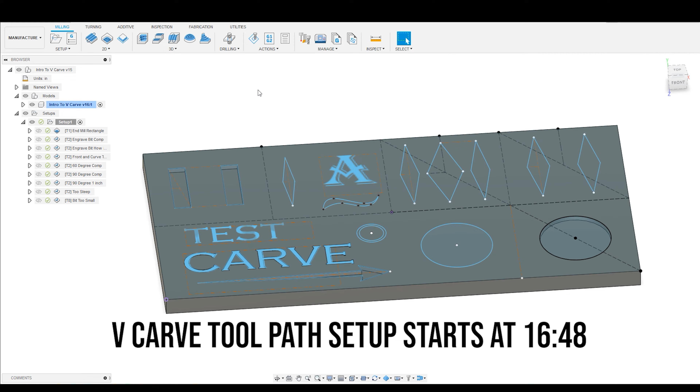All right, so let's start at the very beginning because I have heard that that is a very good place to start. And the first question is, what is a V-carve? A V-carve, as the name suggests, is carving into a material with a V-shaped bit like you see here. The next question is, why? Well, a V-shaped bit allows you to create, in your carve, sharp interior corners compared to what a round milling bit will create. So let me show you that with a quick example.

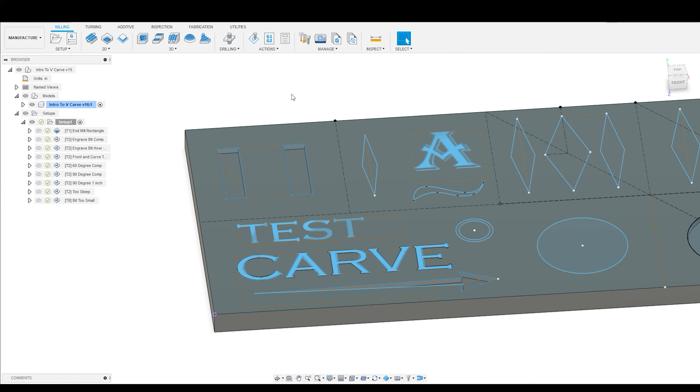Right here, I have two rectangular pockets. And in the first pocket, I've actually already set up a couple of toolpaths. And I've set this first toolpath up with a 1/4 inch end milling bit. Okay, so it's a 1/4 inch. And as you can see a little bit here, but I'm going to go ahead and simulate it to make it a little bit easier to see.

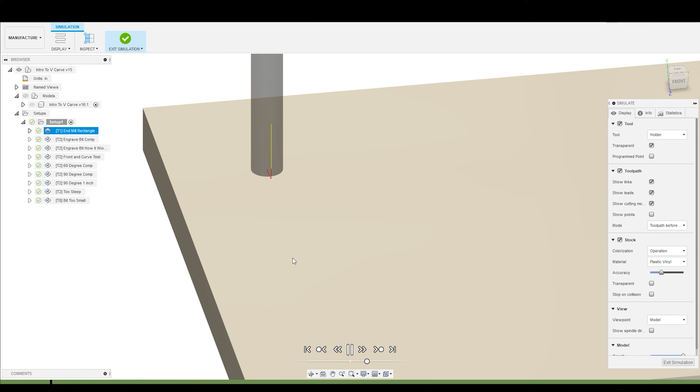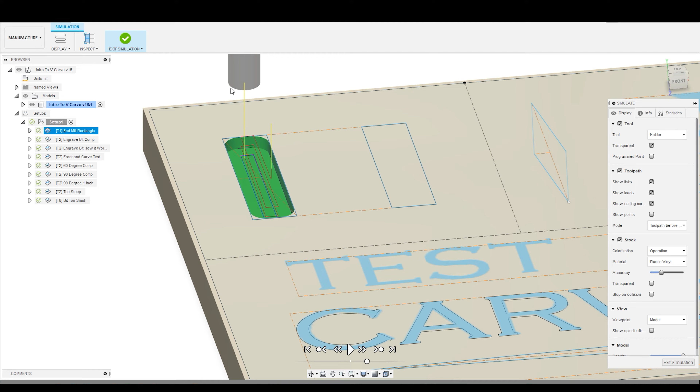As you can see, when I carve with a round end mill bit, the sharpest corner that I can create is the radius of the bit itself. In this case, it would be 1/8 of an inch. So even though I've got these sharp corners in the designed pocket, the tightest radius I can get is this 1/8 of an inch here.

By contrast, rather than using a round end mill, if I was to use a V-shaped engraving bit, as we see in example number 2, and now I'm going to simulate that, I am able to vary the depth of the cut, thereby allowing me to create the sharp corners that I had originally designed in. The next question is, how does V-carving work?

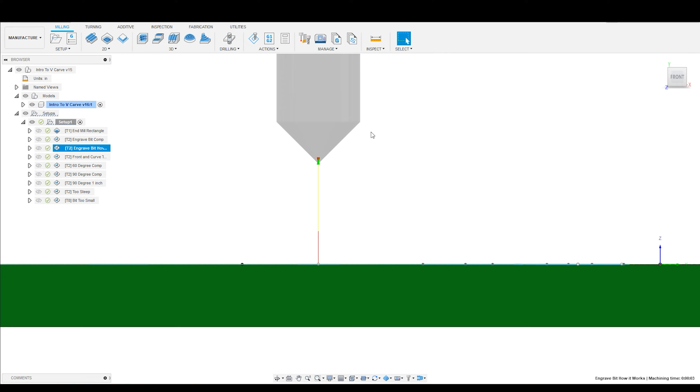Well, in order to illustrate V-carving, I'm going to pull up example number 3. So, V-carving, because I'm using a V-shaped bit, you can imagine this as my cutting surface. Starts off very, very narrow, and the width of the bit increases as you go up the sides of the shaft, or the cutting face.

So, if I go ahead and create this as a simple toolpath, what you'll see here is when I simulate this, the width of the cut here, as you can see, starts off very narrow and then it widens out. The width of the cut is determined by the depth of the bit. All right, so let's see that really quick.

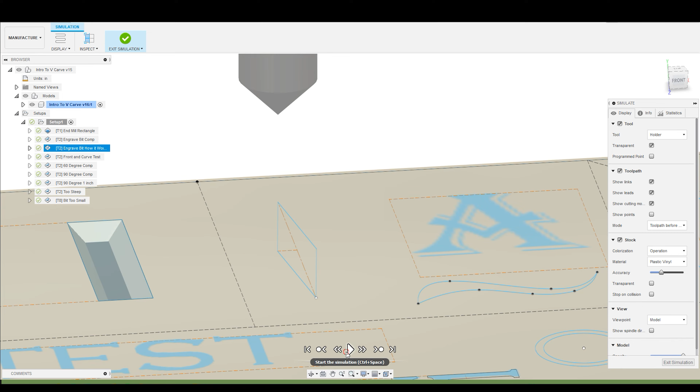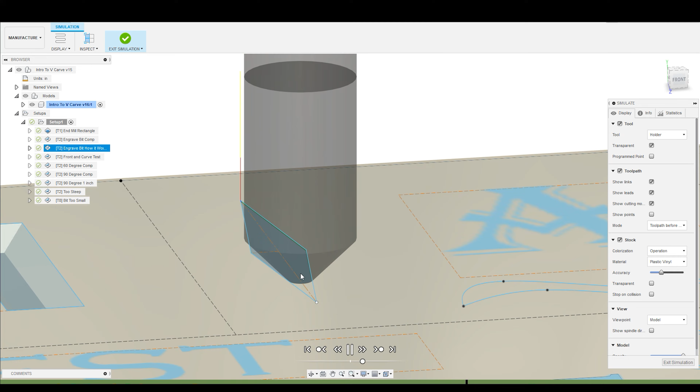As you can see here in this example, the bit, I'm going to change the angle a little bit and I'm going to slow it down. The bit is going to go deeper as it goes across the cut, thereby increasing the cutting width. And then as it starts to go back up, it will decrease the cutting width.

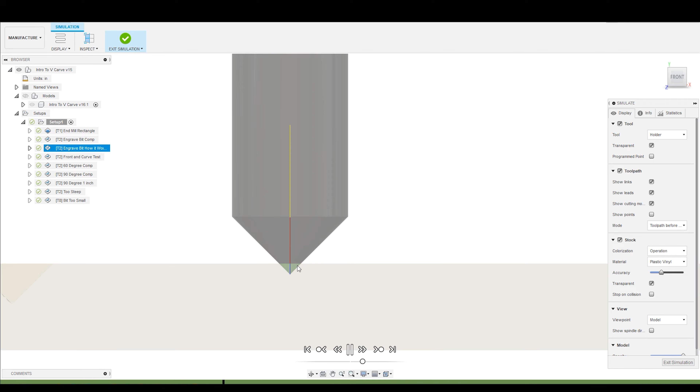I'm going to show you that one more time in the front view, and I'm going to turn transparency on. So let's look at that again. As the bit comes down, it's going to start off with essentially a 0 cutting diameter. And as it enters the material, the cut is going to get thicker as the bit goes deeper and narrower as the bit goes back up.

So in essence, it is the movement along the vertical axis, in this case the Z-axis, that allows me to change the width of the cut.

For this reason, V-carving is often referred to as 2.5D carving, because while the design that you are carving is essentially two-dimensional, a two-dimensional sketch sitting on a three-dimensional workpiece, because the bit is moving up and down and the depth changes are creating some geometry changes, it's essentially 2.5D carving.

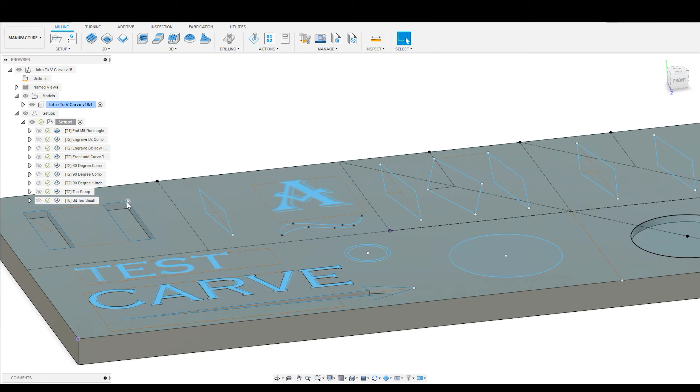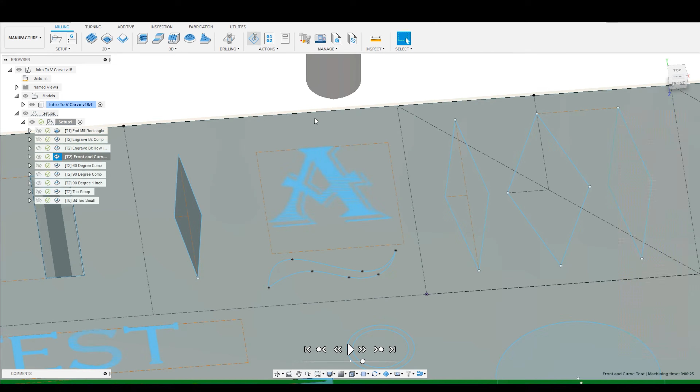Now, beyond just cutting sharp interior corners for things like squares and rectangles and diamonds, V-carving is also very useful when carving things like text and organic curvature. So for example, with the text, you can see, I'm going to start the simulation. With a simple V-bit, there's a lot going on here, right? There's a lot of very, very small, tight radiuses. There's a lot of detail.

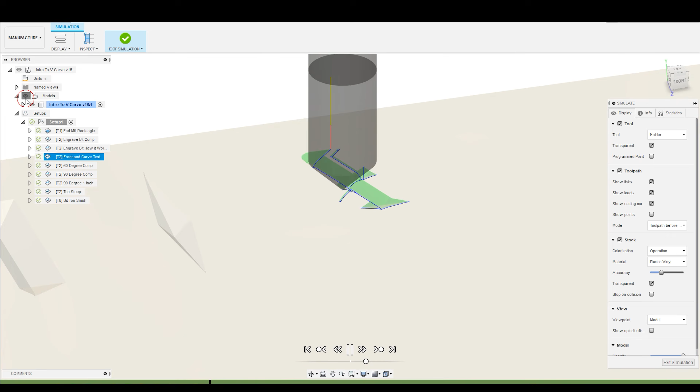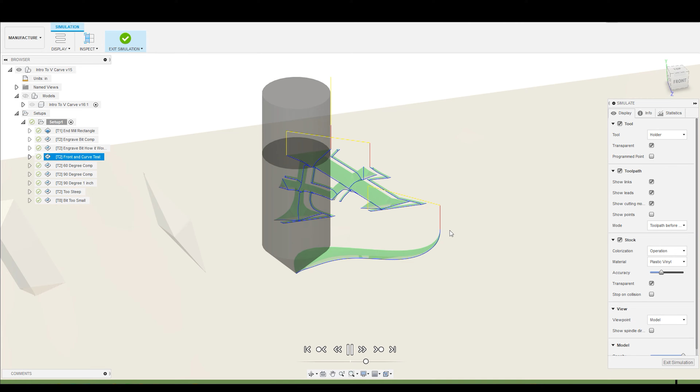And because this bit is able to move up and down in the workpiece, I'm going to turn the model off so you can see it. Because the bit is moving up and down in the workpiece following the form of that letter, I'm able to create some very intricate letter shapes, and beyond that, also some really interesting organic geometry in the face of my workpiece. So typically when you're going to be carving text or small details or illustrations or graphics, you are going to be using V-carving to do that.

The next thing that I want to talk to you about is what type of V-bit to select. There are two primary things that you're going to consider when selecting your bit. The first is the bit angle, and the second is the bit's maximum cutting diameter. So let's illustrate these two properties with some examples here. Let's first talk about the bit angle. So in the first rectangle here, I'm going to use the 60-degree bit, the sharper angle of the two.

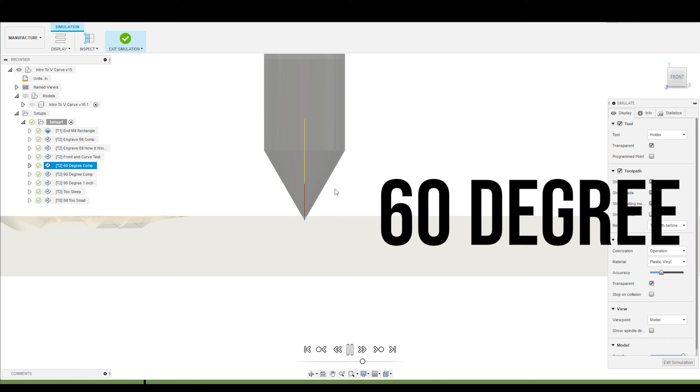All right, and I'm going to go ahead and simulate this cut. And as you can see, I'm able to do a successful cut into this workpiece. Let's look at that again from the front view. And as you can see, this bit has to go pretty deep to achieve the cutting width necessary to create this shape. Now, let's contrast that with our next bit, which is also a half-inch cutting diameter, but instead of a 60-degree angle, the second bit has a 90-degree angle.

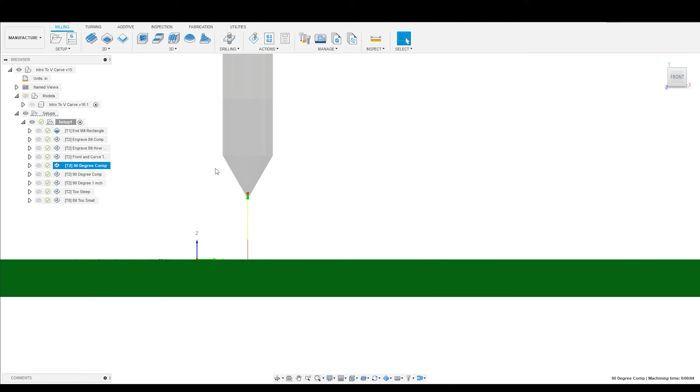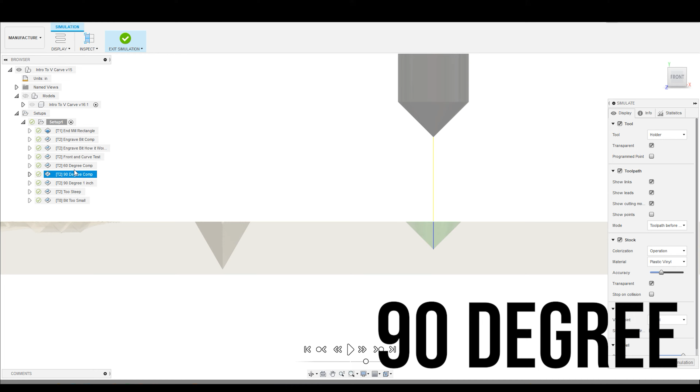So let's look at these at the front view very quickly just so you can kind of see the comparison. So here's our 60-degree bit. It's a very sharp angle versus our 90-degree bit, which is much flatter. All right, same rectangle, and let's create this same cut again. So as you can see, able to cut the shape pretty well, but by contrast, the depth required to create this cut is much shallower than the depth required for the 60-degree bit because it achieves this same cutting width at a much shorter depth in the Z direction.

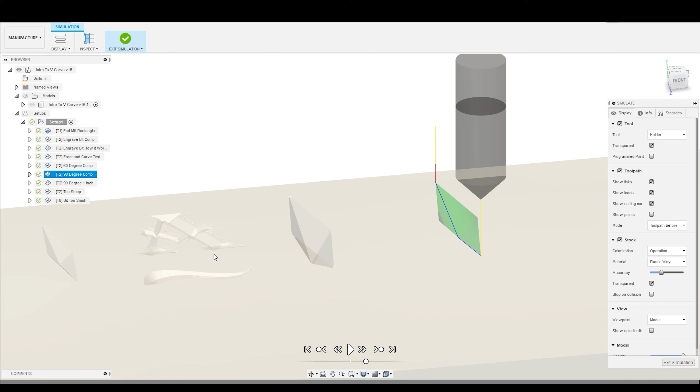So there's advantages to both. In some cases, especially when you're going to have a lot of very tight, fine detail, it often is nice to use a sharper bit angle because you can get a deeper cut. You're going to get more contrast. You're going to get more shadows off the side walls of your cut. But if you have a thinner workpiece, you're going to want to go with a wider or more open angle because it's going to allow you to achieve a greater cutting width at a shallower cutting depth.

The next thing that you're going to want to consider when selecting your V-bit is the maximum cutting width, or the maximum cutting diameter. So in this case, both the 60-degree bit and the 90-degree bit that I'm showing you have a maximum cutting width of ½ inch. Now let's look at this third diamond example. This diamond has a width of about 0.65 inches. Don't remember exactly where I set it, but it's essentially 0.65. Which means that neither of these bits is going to be able to cut this rectangle.

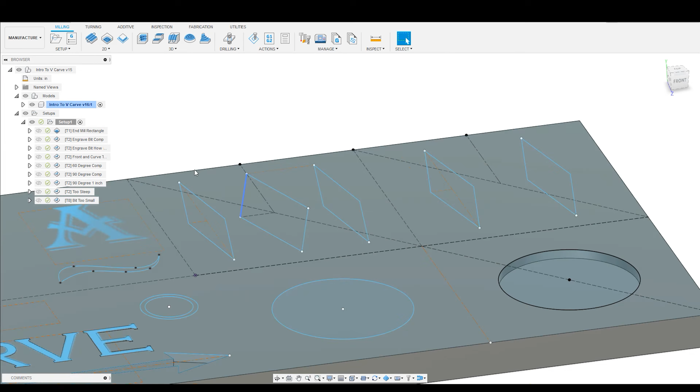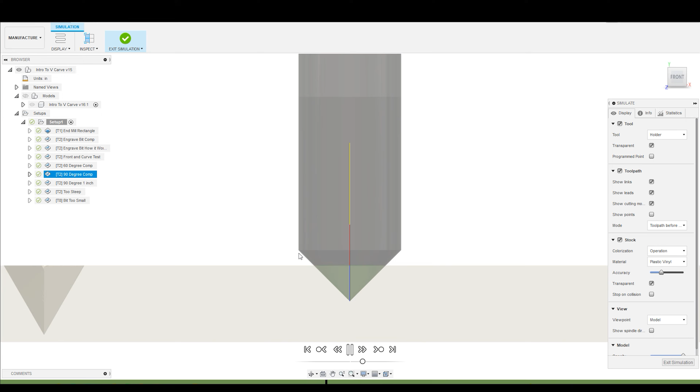Let's go back to that 90-degree bit one more time. And I want to show you where we are. So when I drill this bit down, this is getting very close to the maximum cutting width that I can achieve. So ½ inch here to here. As you can see, I'm going pretty deep, and I've only got maybe 0.1 or so inches left. So I don't have very much cutting face left in order to go deeper and thereby go wider in my cutting width.

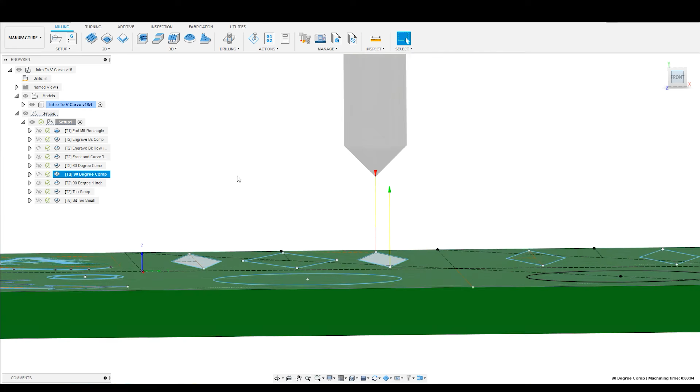So in order to achieve a greater cutting width, I'm going to use a 90-degree bit with a maximum 1-inch cutting diameter, which is going to look more like this. So going back, this is a ½ inch bit, and then this is a 1-inch bit. Same cutting angle, but a much wider maximum cutting width. So let's go ahead and run this simulation. As you can see, this bit is going to come down, and it's got a much wider cutting face in order to achieve that wider width.

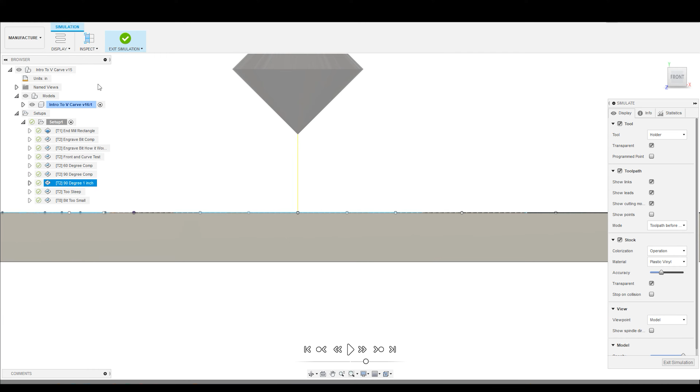Now let's look at the same simulation again from the front view so we can see the comparison. As you can see, same cutting angle as my 90-degree bit, but because I've got this much larger maximum cutting width, I'm able to cut a wider triangle or a wider shape using this bit.

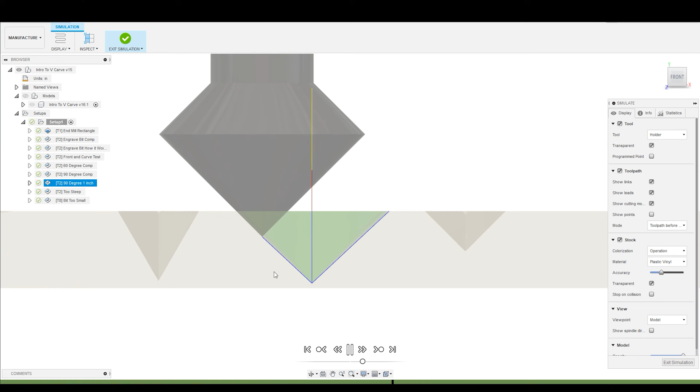So to recap, there's two primary factors that you're going to want to consider when selecting your V-bit. First is the cutting angle, how steep are the sides of your bit, and second is the maximum cutting width of your bit. A wider bit is going to allow you to create a wider cut.

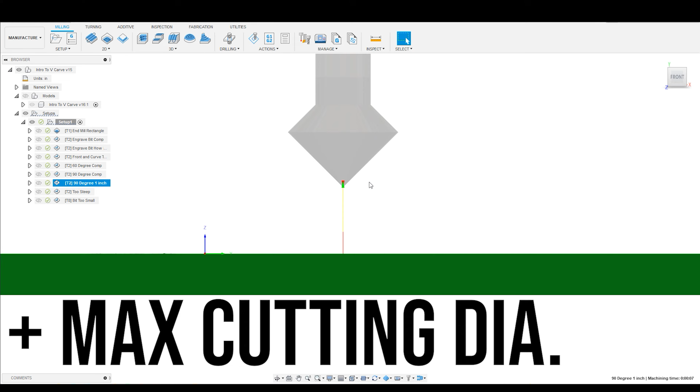So now that we've got that understanding, there are a few other things that you need to consider when selecting your V-bit for your V Carve. And I think based off of this example here, and you can see how deep we're getting into the workpiece, you can start to see what I'm talking about. Now, I'm going to show you what happens when we cut this diamond shape with my 60-degree bit.

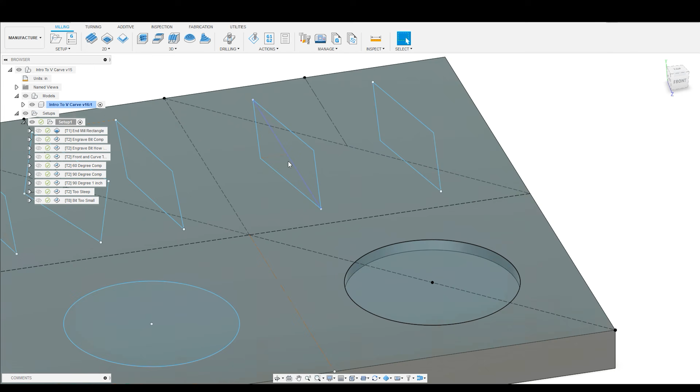All right, so I've got this set up with my 60-degree cutting bit. And it's a slightly wider diamond shape than in the last example. I'm going to run this simulation. Let's turn the model off so we can see the full simulation. Bit is going to come down, start cutting into the workpiece, and we're starting to see the problem here. Can you see it? There's a little hole right here at the bottom.

Let's look at that again from the front face. Run this simulation, bit is going to come down, and as we're starting to get a little bit wider in our shape, right there, our bit has punched through the bottom of our workpiece.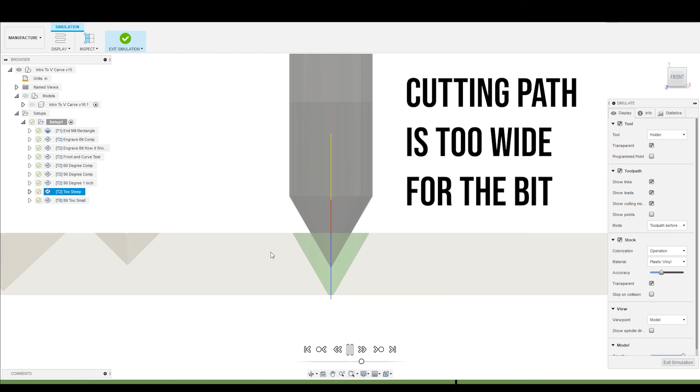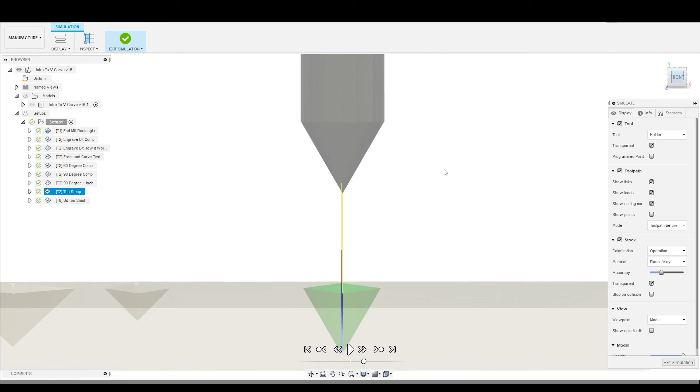Now, Fusion 360, like any software program, is only going to be as smart as you are. It's going to run the toolpaths that you set. So you have to be very careful that the maximum width of your cut does not exceed what your bit is capable of. Because if you are going to go into this situation, not only are you going to end up with a hole in your workpiece, you also are going to run the risk of damaging your spoil board.

You have the potential of breaking your bit if it hits something hard inside of your spoil board. So a lot can go wrong if you don't check your simulations and check your toolpaths to make sure that your bit can handle it.

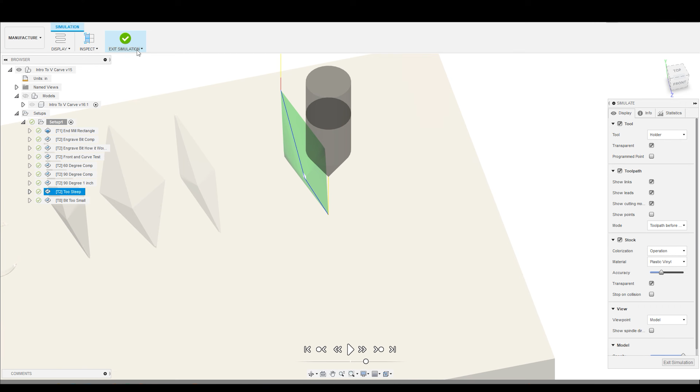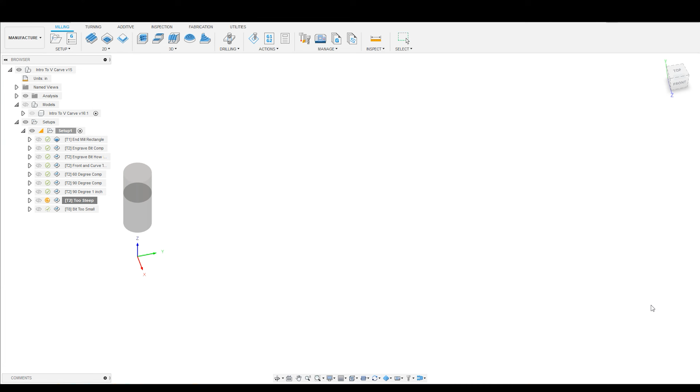Now, this particular issue can be solved pretty easily by going into the toolpath, going to edit, and rather than selecting my 60-degree bit, I'm going to go here and select my 90-degree bit. I'll select that bit and hit OK. Let's run this simulation again, and instead of going with the 60-degree bit, we now have our 90-degree bit. So running the same simulation. Seems to be cutting well.

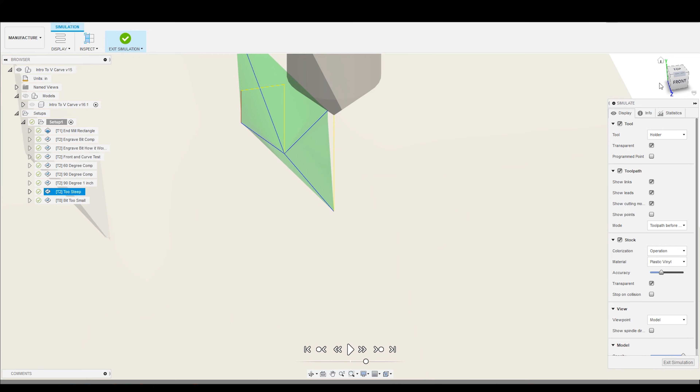And once that completes, we are going to check it. Looks pretty good. And let's go to the front view with the transparency turned on. Check it one more time. And as you can see, I'm able to cut this shape without exceeding the maximum cutting width of my bit and without punching through the backside of my workpiece. Same diamond shape, but because I've chosen a bit with a wider angle, I'm able to keep that cut a lot shallower. Moving to the next example.

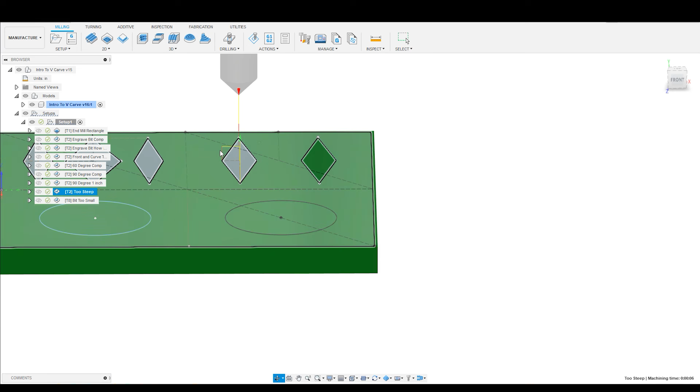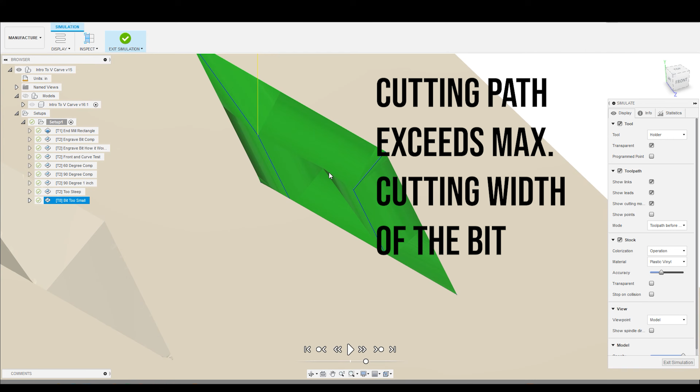Let's say I'm going to take this same diamond shape, and instead of cutting it with my half-inch bit, I set it up to cut with my quarter-inch bit. I think we know what's going to happen, but let's just see so we can confirm. Start the simulation. And what you're going to see here is that the bit is going to go all the way down to its maximum cutting depth, but what do we have here? A peak. We have a peak right in the center of our workpiece.

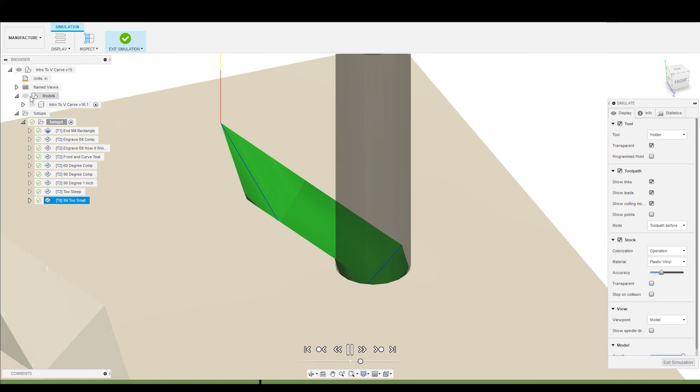Why? Well, because if we look at our simulation again, our bit is traveling all the way at its maximum depth, right? That's the maximum cutting width of this bit, but it's not wide enough to stretch all the way across this diamond shape. So instead, it's going to do the best that it can by going to its maximum cutting depth and then tracing the outside edges of this diamond.

And what we end up with is a high spot in the center that the bit simply can't cut. So the first example, right here, we had a bit that was too steep and therefore was cutting into the backside of our workpiece. In this example, we have a bit that is too narrow and does not have the cutting width necessary for the profile that we've designed.

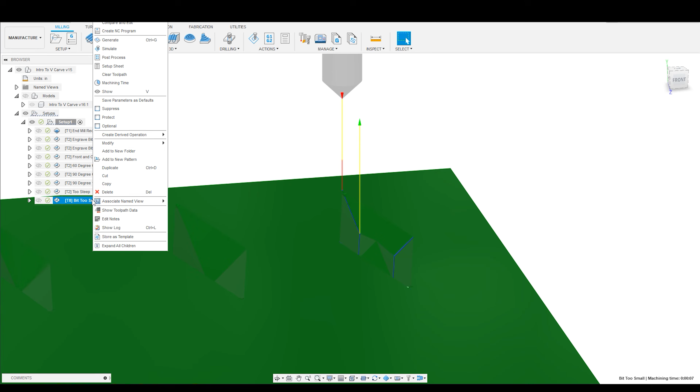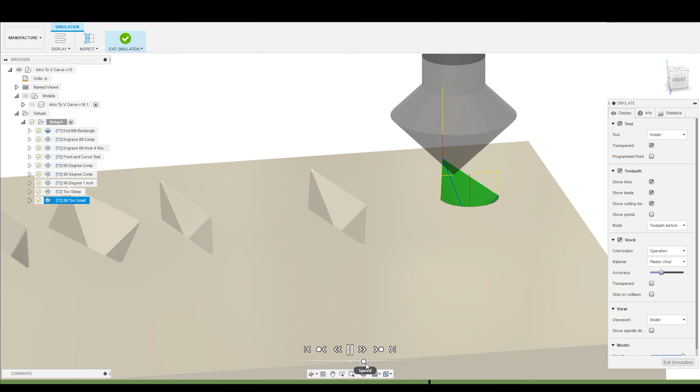This can be solved by checking our simulations before we cut. Come up here, and rather than select my bit with a 1/4 inch, I'm going to move this up to my 1-inch bit. Select, hit OK, and I am going to run this simulation again. And as you can see, I now have a bit with a wider maximum cutting area that is able to handle the geometry that I have defined in my sketch.

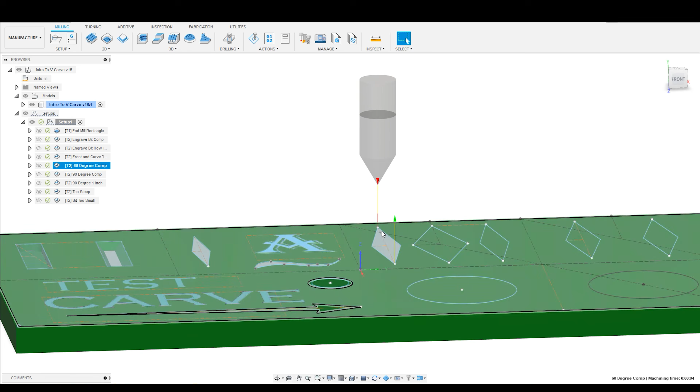So those are the basics of V carving. It uses a V-shaped bit in order to allow you to create sharp corners by moving the bit vertically in order to vary the cutting width. When you're setting up a V carve, you want to consider the angle of the bit, the maximum cutting width of the bit, and the thickness of your workpiece so that you can select your bit accordingly and ensure that your cuts are neither too deep and cutting through the backside of your workpiece or too narrow, not being able to complete the V carve.

Now that you have a good understanding of what V carving is, in the next section I'm going to talk to you about how to actually set up a V carve in Fusion 360. And it's actually quite simple. So what we have here is a sketch. We've got some two-dimensional sketches, and they're all sitting on the top of our workpiece. And this is really important. You want the V carves to be sitting on the top face. In this sketch, I've got two things. I've got some text and I've got some geometry.

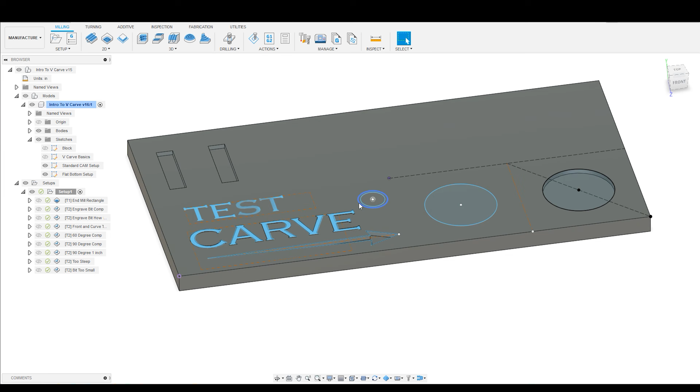To create a V carve, I'm going to come up here to the 2D menu and click on Engrave. In the Engrave, the first thing it's going to ask me to do is select my bit. So for this example, I'm going to go with my smaller 1/4 inch 45/90 degree V carve bit. You can set the feeds and speeds. Next one is where you're going to select your geometry.

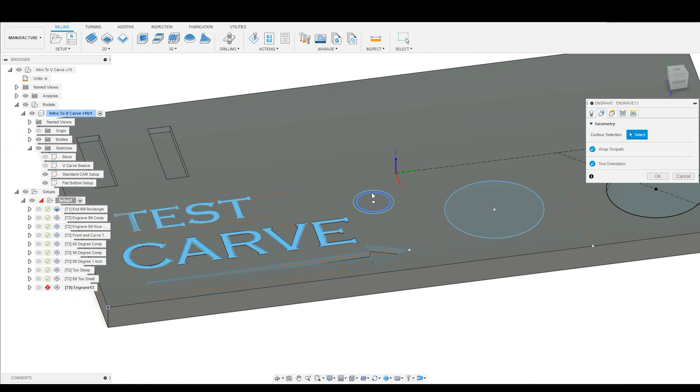When you're selecting geometry for a V carve, it has to be a closed profile. There has to be an enclosed volume that you can capture. And if you have multiple closed geometry loops, if you select multiple of them, it will essentially go on, off, on, off. So this is a closed profile, and this is a closed profile. It's going to assume that I want to carve what is between them.

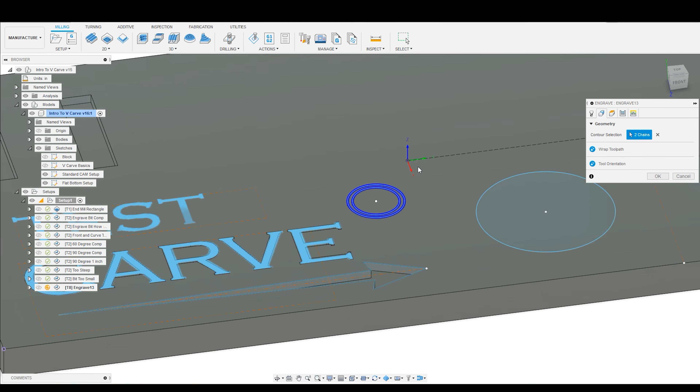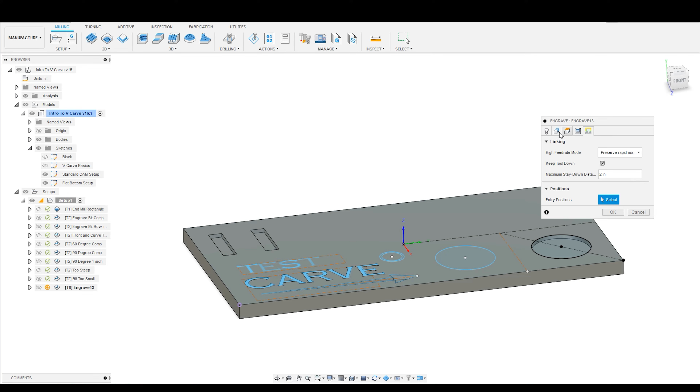Next is the heights tab, which you don't really need to set if you're going to allow the bit to move up and down. You just need to make sure that your clearance height and your retract heights are in the right place. Then under passes, there are not a ton of options here, but you can change the tolerance and the sharp corner angles. You can also go multiple depths if you want to have this cut step down versus do it in single passes. And you can also adjust the stay down distance and the entry position under the linking tab. But the main two tabs that we're going to be concerned about today are the tool and the geometry.

So I've selected this loop and hit OK. And let's go ahead and simulate to make sure that it's done what we've asked. So we're going to simulate this V carve. As you can see, it's found this geometry here. It's keeping the bit down, and it's carving my shape.

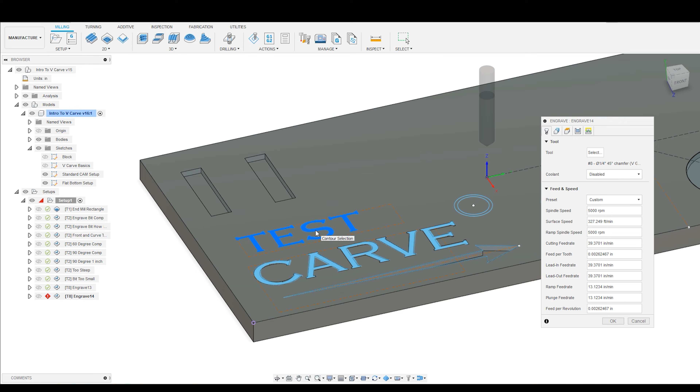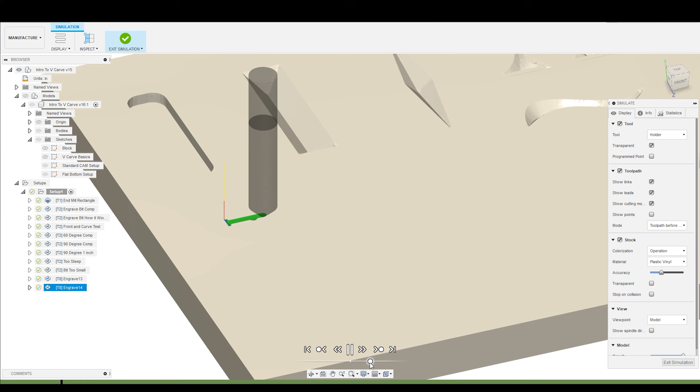I can do the same thing to create my text. So come up here to 2D Engrave, hit Engrave. And one thing that's really cool about Fusion 360 is if you have text sitting in your sketch, it will assume that that is all one contour. So you don't have to go through and select every single letter individually. I'm simply going to select this as my contour, make sure I've got the same bit selected, hit OK, and let's go ahead and simulate this. Transparency. As you can see, it's going to go letter by letter, and it's going to trace the inside of that geometry.

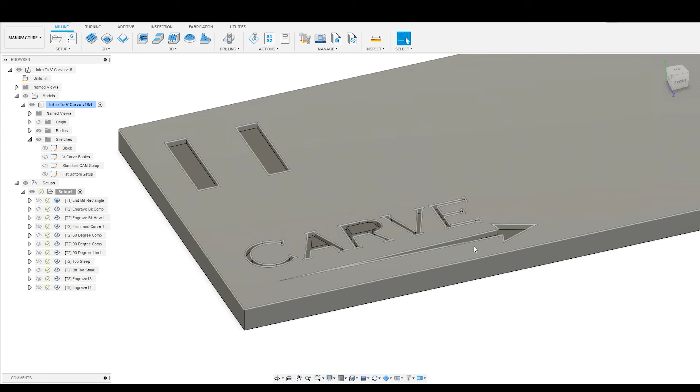You can do the same thing with not only sketches, but actual geometry in your model. So I'm going to turn these sketches off so they're not distracting. You can see I've actually cut these shapes into my model. And so if I come up here to 2D, go to Engrave, I can now select this closed loop. And I can select multiple closed loops, hit OK.

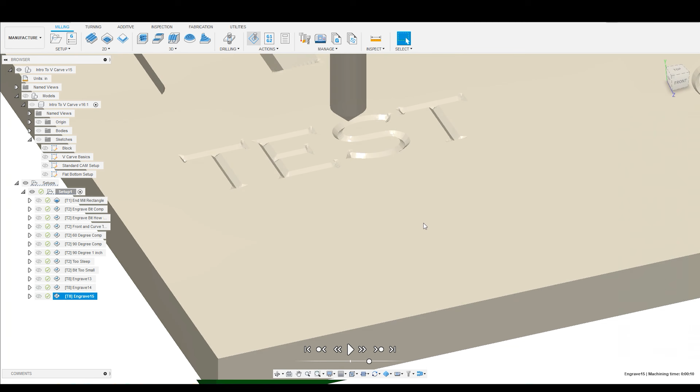And as you can see from the simulation, same thing as with the text, it's going to go through and carve these two letters. Now, if you notice here with the A, I selected two profiles. I selected the outer profile and the inner profile, and just like with the circle example, it closed this geometry and took this geometry out. So it enclosed the area between the two closed geometries.

I'm actually going to go in and edit this toolpath so you can see what happens if I don't do that. I'm going to turn the model back on, and I'm going to add to my selection this R chain here, leaving out the interior. So what happens when I do that? Run the simulation again, turn the model off so we can see it.

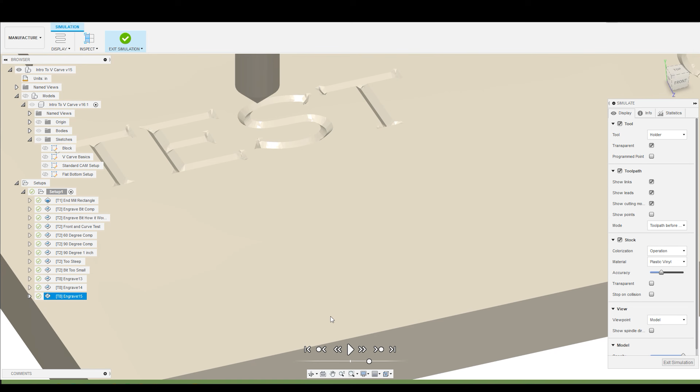As you can see, if I don't select that inner profile, it's just going to come in and carve the outside. Because it's so wide here in the center of the R, you can see I'm getting that V-shaped tip that I got when my bit was too small. But very simple to edit.

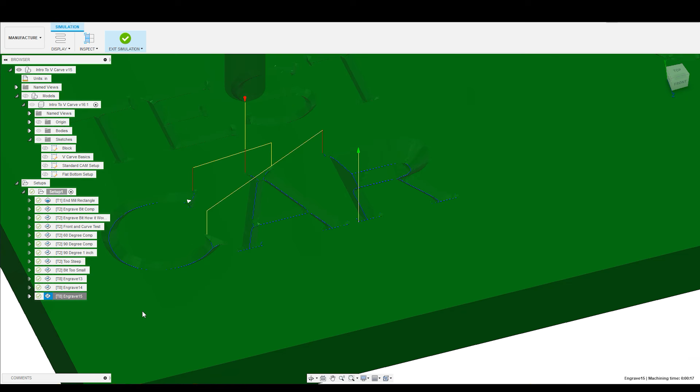I'm going to exit the simulation, come back in, I'm going to turn the model back on, I'm going to add this inner R shape to the toolpath, turn the model off so I can see the simulation, simulate again. And as you can see, it has now correctly identified my R.

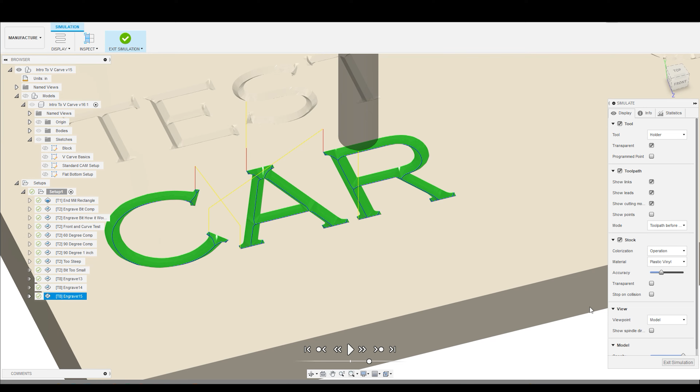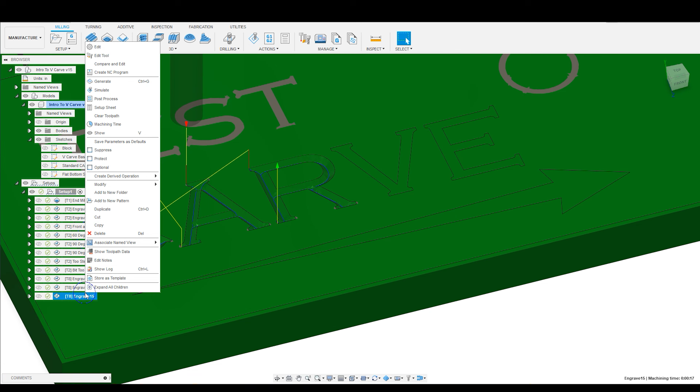Now you'll probably notice that in that example, because I had actually extruded this text so it became geometry and not text in a sketch, I had to select every letter individually because each one of them is its own chain. I can do the same thing going back here and editing my toolpath. So I can add any other kind of geometry, not just text, but any kind of geometry that is carved into this face can be added to my selection.

And you can now see that as part of this simulation, not only do I have the letters that I've selected, but I also now have this arrow shape. Very cool. And as you can see here as well, you don't have to go through and select every single thing as an individual cutting path.

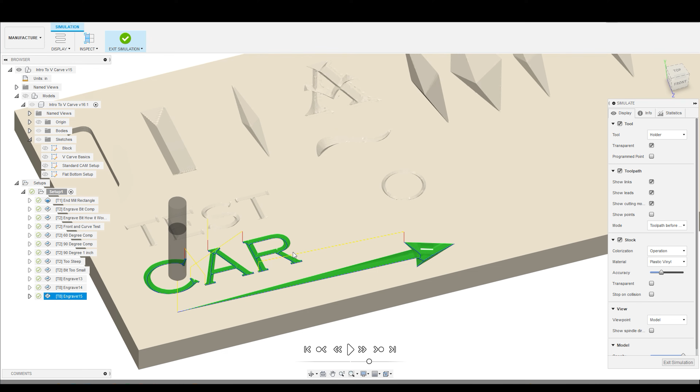So I did that in this example document so that you could see and we could go through it multiple times so you can understand the process. But once you've got everything laid out in your 2D sketch, if you're able to cut it with the same bit, you can select multiple profiles as part of the same tool operation.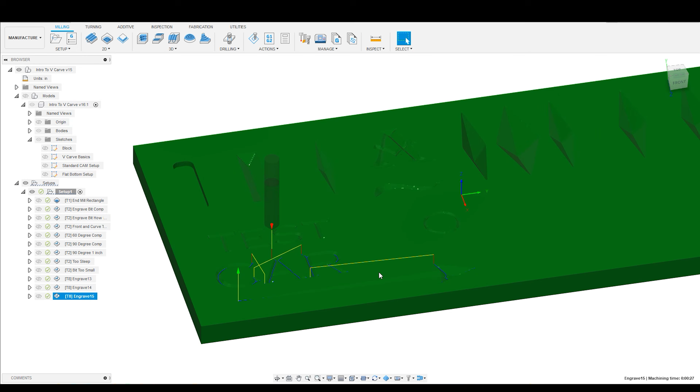All right, I'm going to exit the simulation, and there's one more thing that I want to show you before we end the episode. As you can see, I'm starting to get that same tip in my arrow. Now, let's say for this example, I like the depth of my text, and I really don't want the middle of my arrow to go super deep into my workpiece.

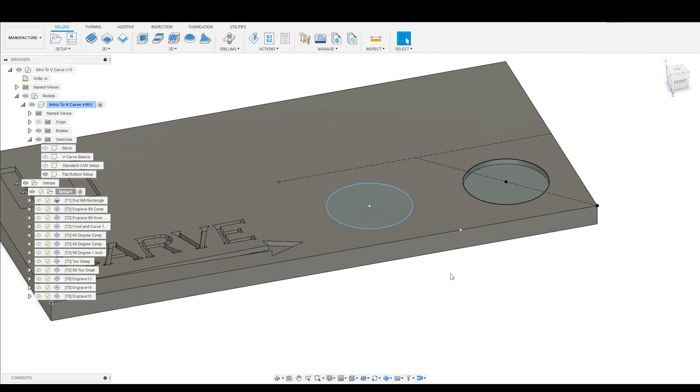Or, alternatively, let's say I've just got a larger circle in my model that I would like to V-carve. It's about 2 inches wide. There's no bit that I could find that's going to allow me to V-carve without punching through the back of this workpiece. So let's set this up and see what happens.

Let's say I use that same engraving bit, that 1/4 inch 45/90 degree bit, hit OK. And when I simulate this, turn the model off, you can see I've now got this big disc in the middle. It's the maximum cutting width of my bit. How can I solve for this?

Well, what we're going to have to do is create a flat bottom V-carve. And there is no operation in Fusion 360 to do that as a single step. We have to set that up as 2 toolpaths, and we have to use a little bit of trigonometry.

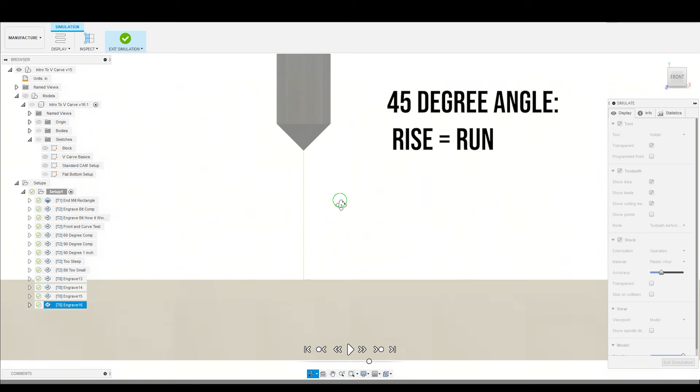All right, so let's think about this bit. This is a 90-degree bit. So whenever it cuts down, it's going to cut the same distance over. If you imagine this is the workpiece, however far it cuts down, it's going to cut the same distance over. So for example, this is going to be theoretically half the width of the bit, and this up and down depth of the cut is going to be half of the cutting diameter of the bit.

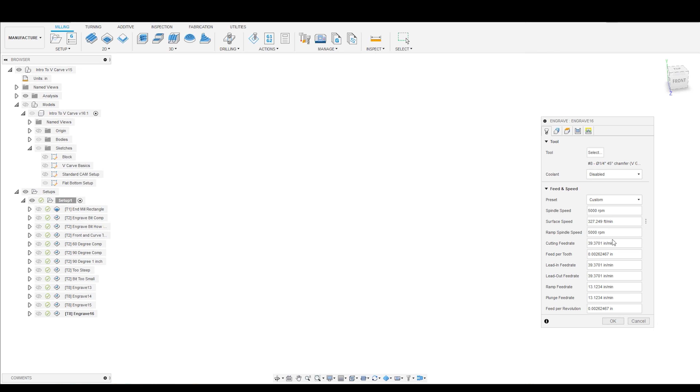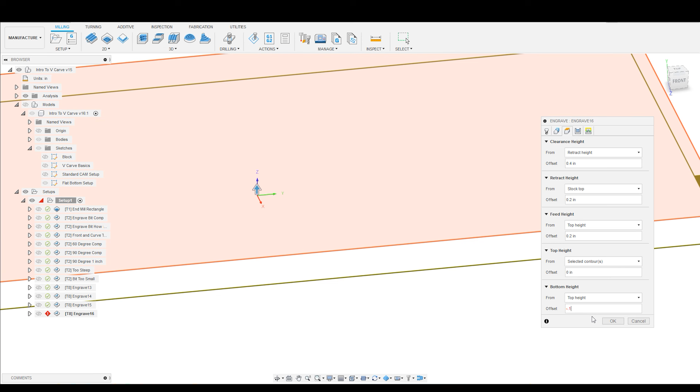Okay, so let's go into our toolpath here and check what that is. It looks like if we go into the height, the bottom depth is about 0.11875 inches, okay? So that's how deep the bit will go at its maximum. So let's instead adjust that so it goes a little bit less than that. We're going to go negative 0.1. So ease it up a little bit and give us a number that we can easily remember. All right, so that has now decreased a little bit.

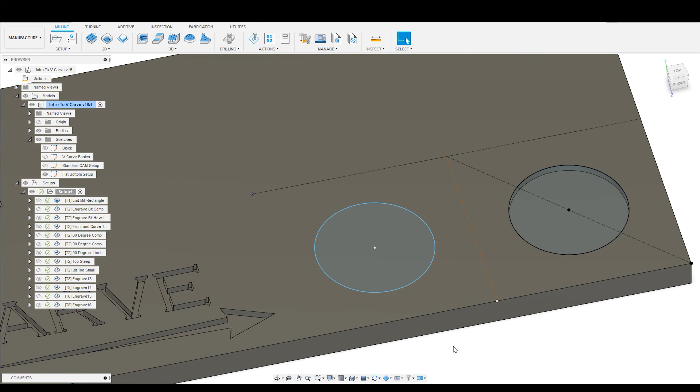And now what we're going to do next is create a flat end mill profile using the same shape geometry, but we are going to change the stock offsets in order to compensate for the V-shaped edge that we already have. So thinking about what we've done here, we have now changed the cutting depth to 0.1, so we can assume that the sidewall of this V will also be 0.1.

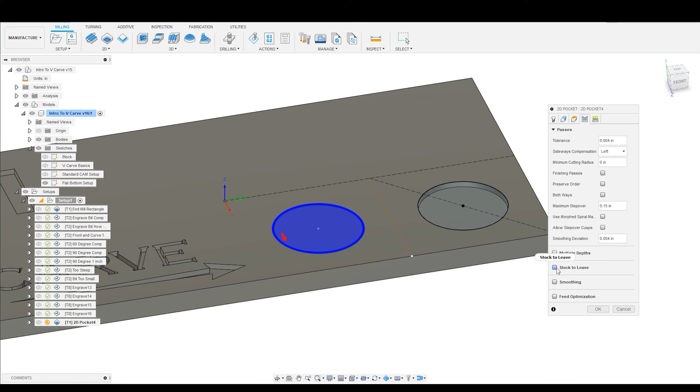So here's what we're going to do. Let's go back to our model, and we are going to add a 2D pocket. We're going to select this as our path. We are going to change our tool to a 1/4 inch flat end milling bit. All right. And now over here in the Passes tab, we are going to select this option here, which is stock to leave. So what we want to do is we actually want to leave 2 stocks.

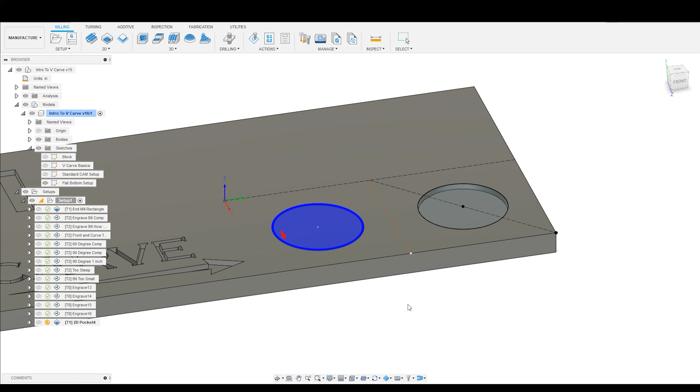The radial stock is the amount of stock off of the side of the bit. So in this case, it's going to be 0.1. And the axial stock to leave is going to be negative 0.1 because we actually want it to cut down to that depth along the axial direction of the bit, and we want to leave some material along the diameter of the bit. Let's hit OK, and let's see what that toolpath looks like.

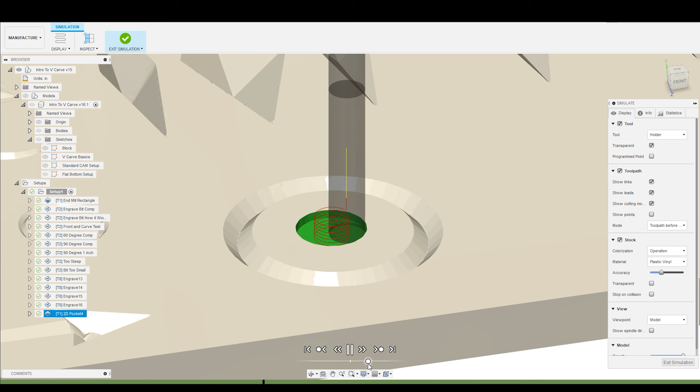So I'm going to turn the model off, and we're going to simulate this path and go a little slow just to show you what's going to happen. So the bit's going to come down. It's a flat end milling bit. It's going to start to ramp its way in and then cut this face out. And as you can see here, I'm going to start to slow it down. It's slowly increasing its cutting depth.

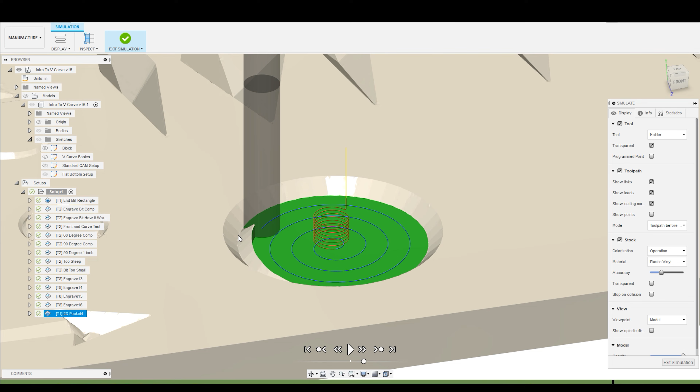And right there, you can see that the end of this cut is perfectly aligned with the maximum depth of this V. And it's going to give us a nice flat surface all the way around. And with that complete, we now have a flat bottom V carve.

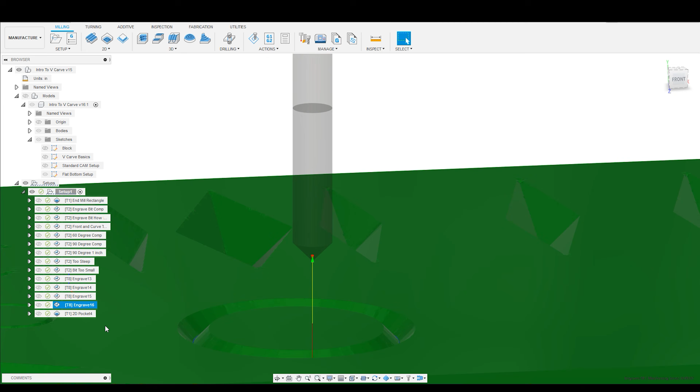So walking through that again, just very quickly, to create that you want to select a V carving bit. In my opinion, it's easy to do it with a 90 degree because it makes the math easy. You are going to set the maximum depth in the bottom height tab here. Then you're going to create a pocket mill with a flat milling bit that is going to have a radial stock that is equivalent and a negative axial stock that is equivalent. And that is how you're going to achieve a flat bottom V carve.

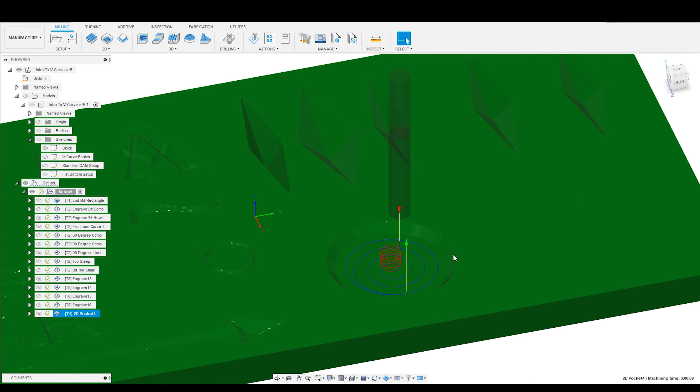Now, I will tell you that there are some situations that are going to be a little bit more complex to set up, but we'll save those for a different tutorial.